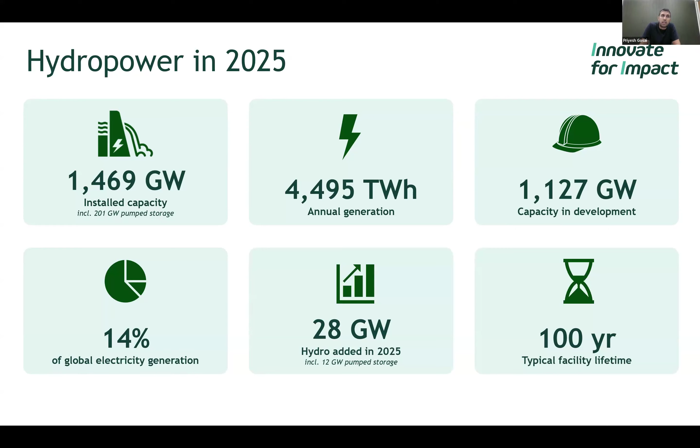So we can break down hydro plants into a few characteristics. You firstly can look at run-of-river. So you have a river where you install a diversion, and you can take a portion of the water through the diversion and pass it through a turbine. The turbine turns a generator and produces electricity, and the discharge is then released downstream in the river.

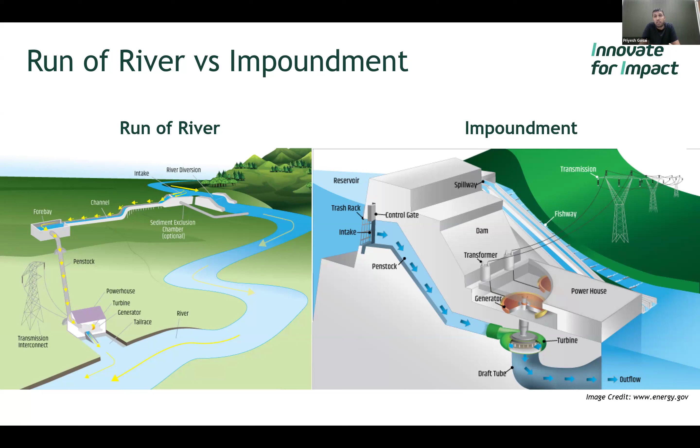If you want to add some storage, you've got to have an impoundment type hydro plant where you've got to build a wall and then control the flow in and out and store a large amount of the water behind the wall such that you can then have either daily or even sometimes seasonal storage, which is very, very useful in certain regions. And then there's the idea of pump storage.

So instead of just having one dam, you have two dams, an upper and a lower dam, and you would pass water from the upper to the lower dam to produce electricity, store that water, and when electricity prices are low or when there's an excess in electricity, you can pump that water back up for the next cycle.

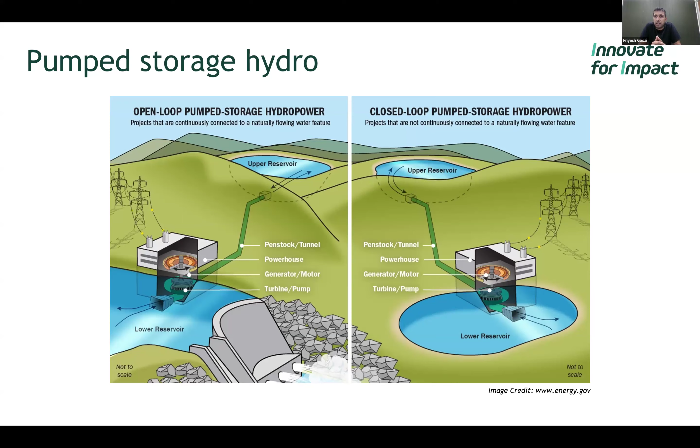And these also have an open and a closed loop, where the open loop allows water from the external environment to keep flowing in, and the closed loop would just be two dams that operate kind of outside the environment, not always completely, but in some way or form.

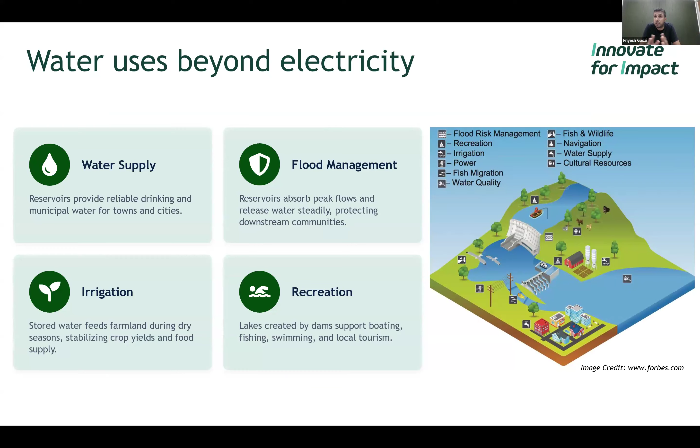So what do we have? We have to firstly convert the water flow rate into power. And essentially, the fundamental equation is rho g H times the flow times efficiency. And what I typically define is what we call rate 2 in the process component, which is the power over the flow rate. The efficiency typically is a function of the flow rate, so that can become a bit complicated.

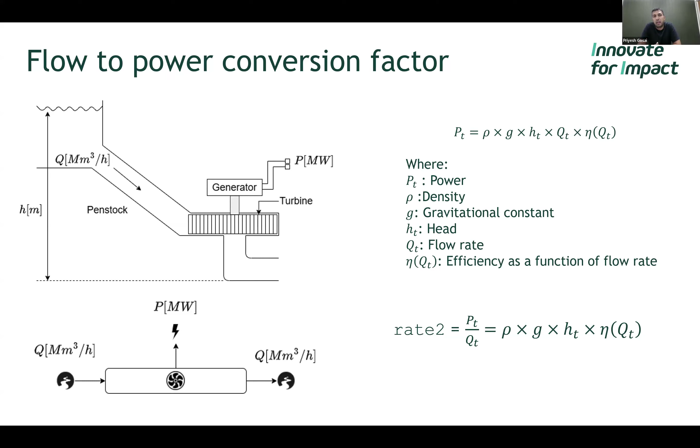But we'll always need to simplify things for our energy system models. And as a result, if you simply take a hydro generator, which has a rated head and a rated discharge, rated power, you can very basically calculate the power over the flow.

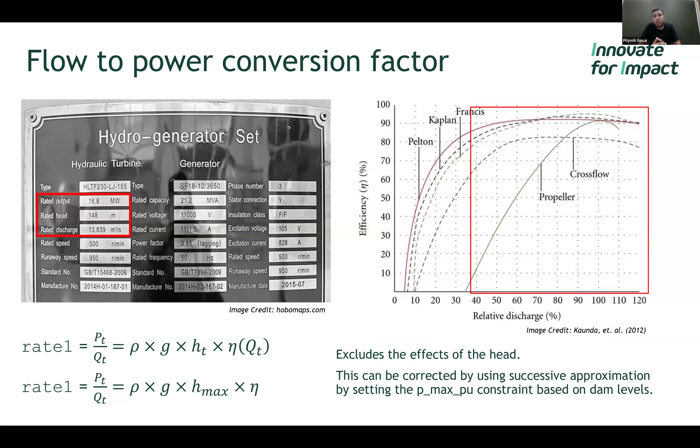And this assumes that the operating efficiency is constant, which is kind of true for a broad range of the operating range of a plant. And it excludes the effects of head. So the level of the dam also affects the total power output. Typically, what I'll do is I'll correct it through successive approximation techniques after the solution has been produced.

So there are a few ways you can model hydro plants in PyPSA. The one way is the storage unit component. It's quick, it's easy, simple. You take the inflow variable in the component, and you can set that inflow variable in million meters cubed per hour, and then use the efficiency discharge variable as the conversion factor. So that would mean that the efficiency is sometimes greater than one, but you have to reframe your thinking as though that's a conversion rate and not an efficiency.

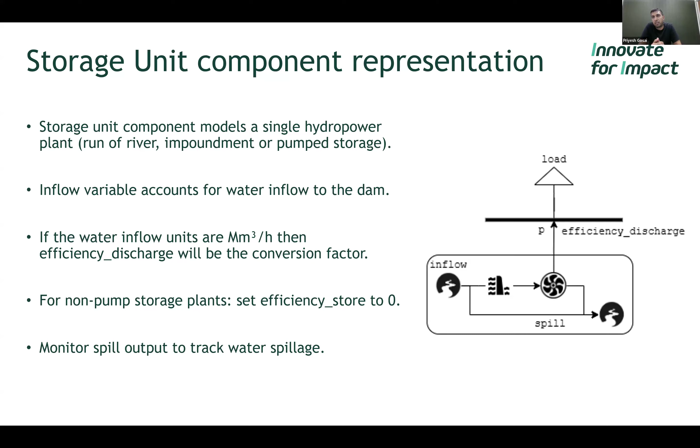In that way, you measure your inflows in million meters cubed per hour and your discharge or your energy produced in megawatts. And for non-pump storage plants, you'd have to set the efficiency store, that's the efficiency at which the storage unit extracts electricity from the grid, to zero, and that stops any inflow of electrons to the hydro plant. And you can also monitor the spill.

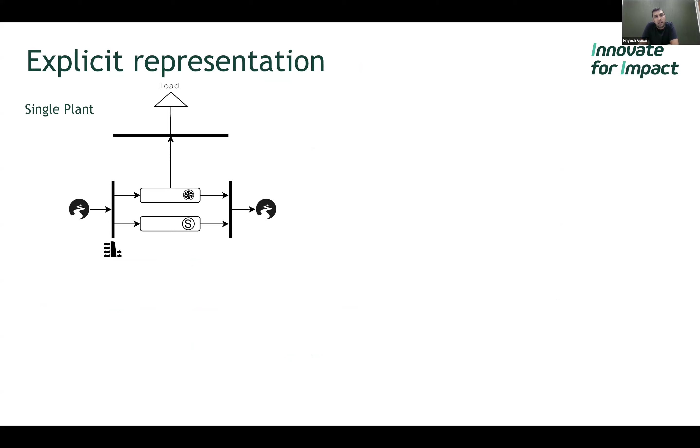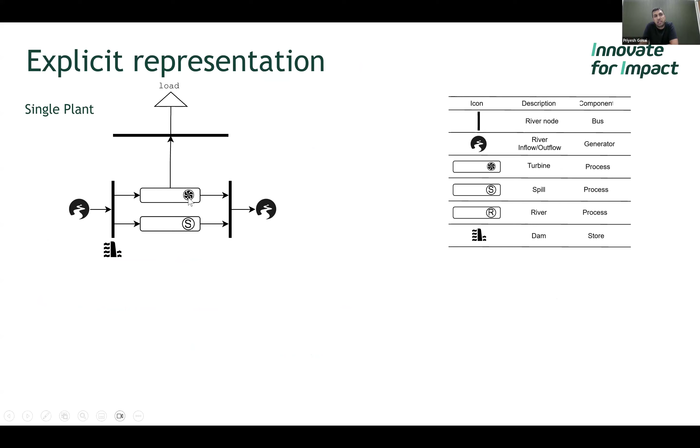If you want to do something a bit more complicated, you can explicitly represent it. So a single plant will be represented by a bus, an inflow generator, an outflow generator, or river inflows, as well as process components to represent the turbine as well as the spill. For cascaded plants, you would do the same thing, and you can interlink them with the river component that has the fantastic delay feature that was recently added in PyPSA version 1.2.

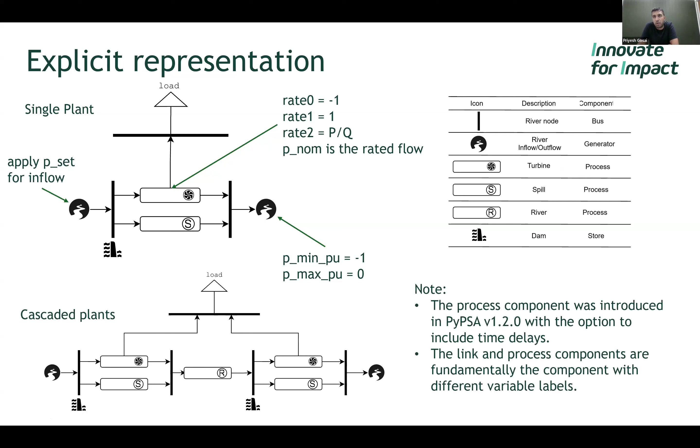So all of the process component features are only available from PyPSA version 1.2, so just make sure you update it. And you need to set rate 0, rate 1, and rate 2 accordingly. So for me, it's worked to set rate 0 to -1, rate 1 to 1, and rate 2 to the P over Q ratio that I discussed earlier.

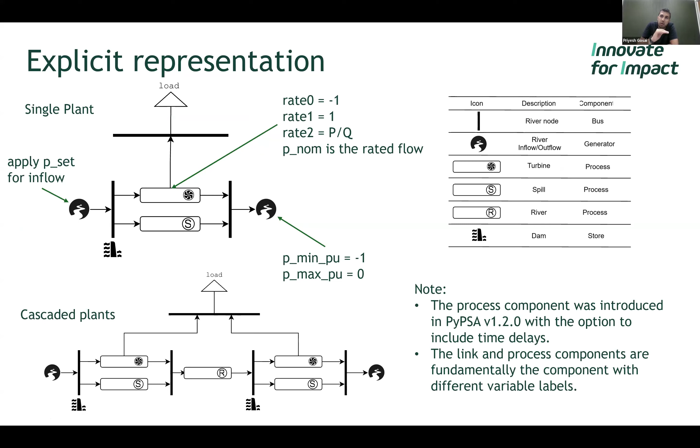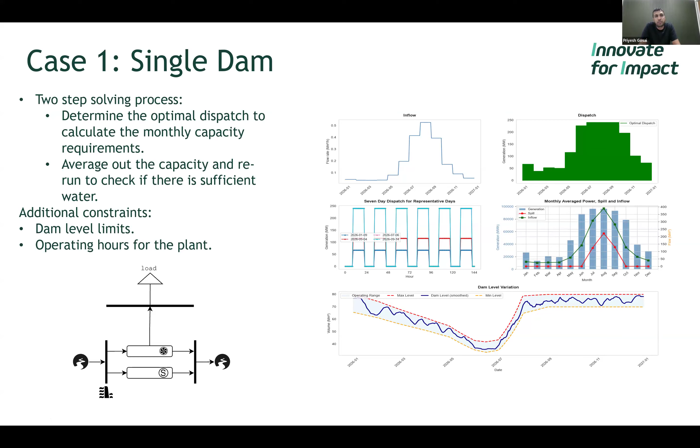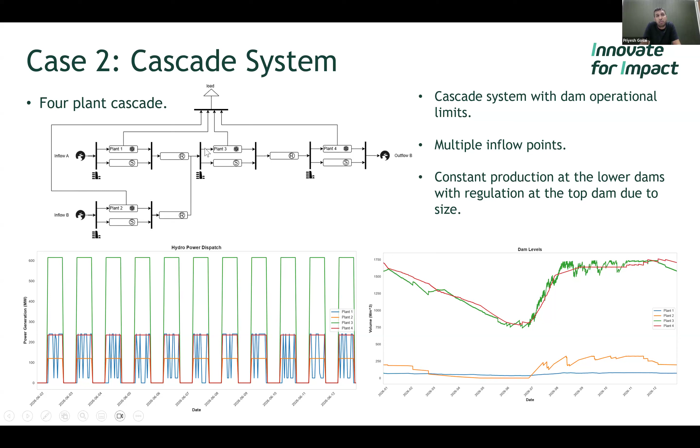So these operational constraints need to be taken into consideration, put in based on your Emin and Emax constraints, run the model, and you can keep all of these constraints in the simulation. You can then expand that into a cascaded system. So in this case, I've got four plants. You've got an inflow at each of two plants on the top of the cascade that connect into a third plant, and eventually discharge out of the system. You can even have inflows intermediate to that if you have measurements.

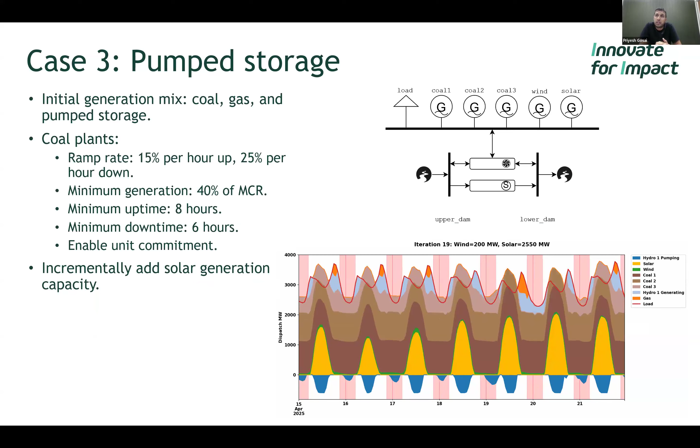So for pump storage, this is an interesting case. Coming from South Africa, we've got large amounts of coal. And in the days of coal, when coal first started, you would not want to ramp the coal plants up and down. To avoid switching on and switching off your coal plants, we installed pump storage. And this has meant that pump storage was traditionally used in this capacity.

In the nighttime, when there was excess electricity, we would run our pump storage. And in the daytime, that pump storage would then be providing the peaking capacity. However, if you start increasing the amount of solar in the grid, that profile shifts: you start pumping during the day, and you use that electricity for the evening and the morning peaks.

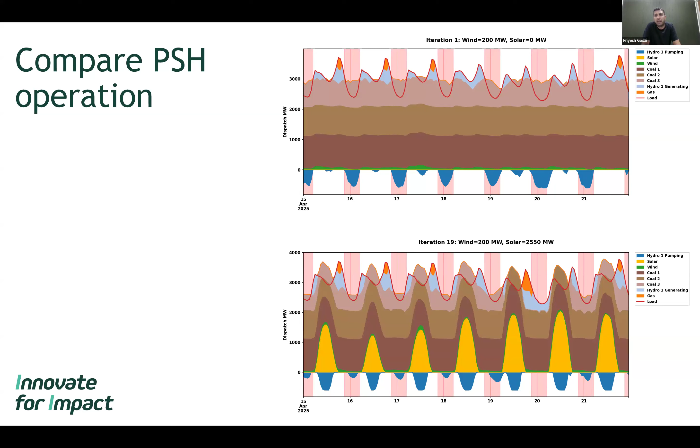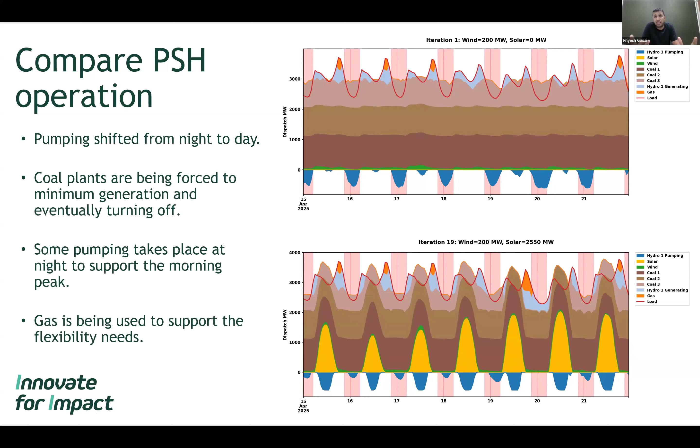But in some instances, because coal plants are quite inflexible, you may even need to pump a bit at night just to avoid switching off your coal plants. So there are multiple opportunities, but this kind of analysis is very, very interesting if you want to understand how coal plants operate.

So estimating the inflow has been quite a big challenge. I've been using the GRDC database, local measurements from site. Sometimes I have to take precipitation measurements and relate it to the inflows, as well as some of the environmental impact assessment reports.

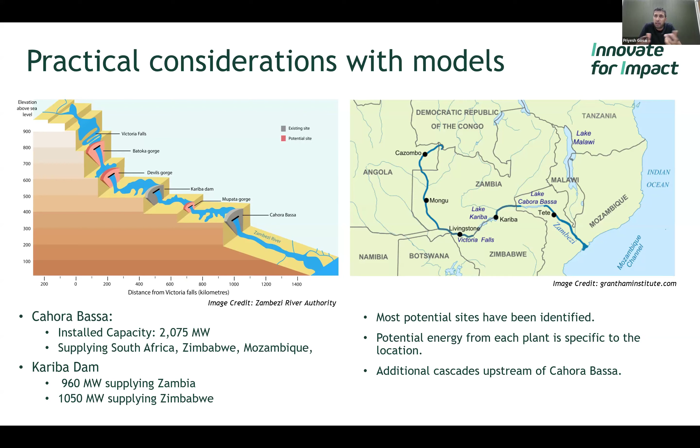So an interesting case is the practicality of modeling hydropower is not always that simple. This is the Zambezi River. It's on the border of Zambia, Zimbabwe, and Mozambique. Not all of the plants supply power to the same country, and they all operate in a cascade that needs to be coordinated.

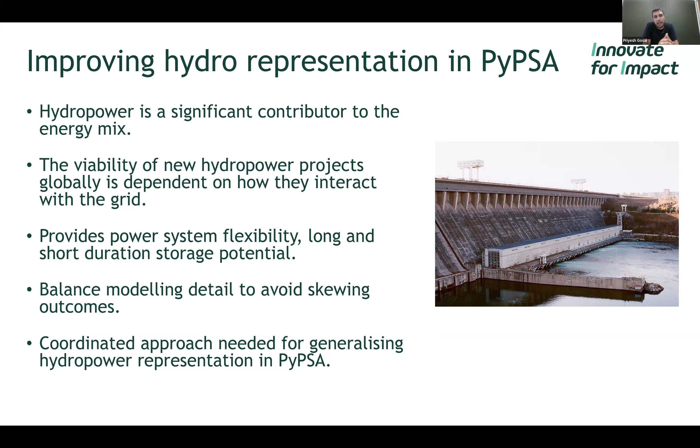So what would I like to talk about in terms of improving the representation of hydro in PyPSA? We have to recognize hydro is a significant contributor to the energy mix. It's a strategic opportunity in terms of flexibility. And we need to find a way to balance the modeling detail without skewing the outcomes that we need to understand how to capitalize on this asset. And it's going to be very valuable if we can start coordinating a generalized approach to representing hydropower in PyPSA.